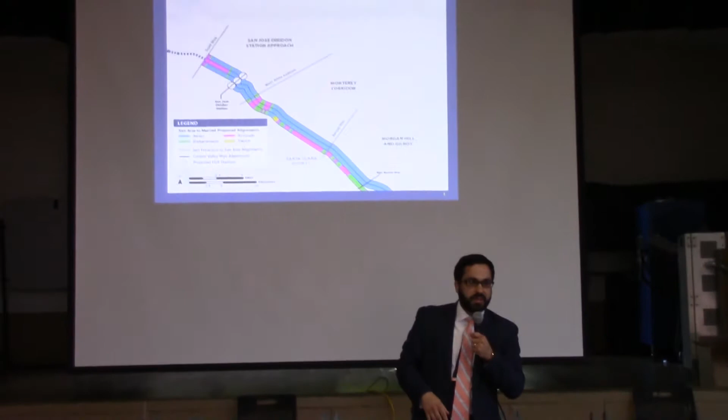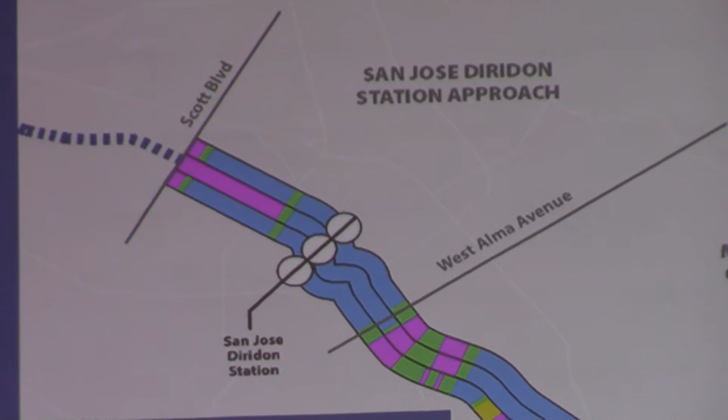To give a bit of the background and history of where we were in 2017, these were some of the alternatives we were looking at in San Jose. Starting from the northern part of the city, we were looking at a couple of different options north of Diridon, going into a viaduct and aerial structure over the existing tracks for the high-speed rail platforms, then continuing the aerial over 280-87 before coming back to grade south of the existing Caltrain Tamien station, and then either coming back onto a viaduct in the middle of Monterey Highway, or in between, or in an at-grade alignment between Monterey and the Union Pacific.

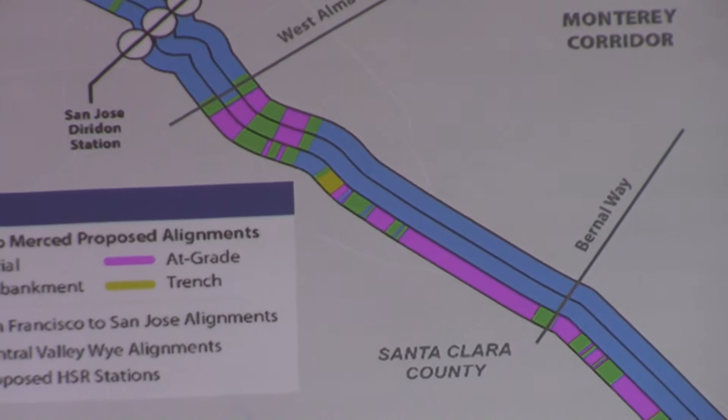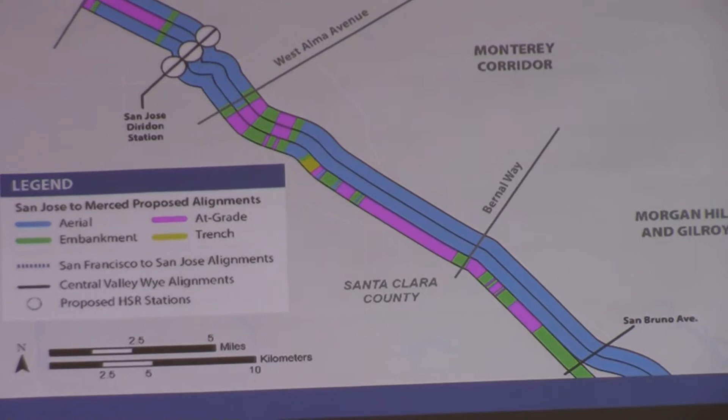Now, those were what we had. This is context setting of where we had left off. We've continued to look at things, both the city has as well as we have. That's part of what we introduced in the 2018 business plan, starting to move beyond some of this. So this is just to bring everybody up to speed on where we left off last time we were here.

What we've done over the last 6, or now I guess it's 9 months or so, we've developed a 2018 business plan, and that was submitted to the legislature in late May. So I'll talk about what that says and what it means.

We've worked with Caltrain on developing the blended corridor service plans and concepts, really looking at how the two systems work together. Some of that was mostly focused north of San Jose, so San Jose to San Francisco. But we started to look at extending that blended system concept down further south. So I'm going to steal a little bit of my own thunder here. In terms of starting negotiations with Union Pacific, what we're talking about is extending that blended system down from San Jose all the way to Gilroy using the existing Union Pacific corridor.

That really helps with some of the concerns about impacts, being able to minimize those by staying within that existing corridor and looking at sharing tracks between us and Caltrain there, in a similar blended system with a freight track next to it.

Caltrain has also been doing a lot of work, and since they're not here, I'll talk a bit about it. They've continued to advance their electrification project, doing a lot of work to modernize the corridor. We've been part of that effort with them in terms of bringing modern electric trains into the service between San Francisco and San Jose, and they've started to develop their business plan and approach, which is their next big planning document looking at the long-term service vision for how the systems work together.

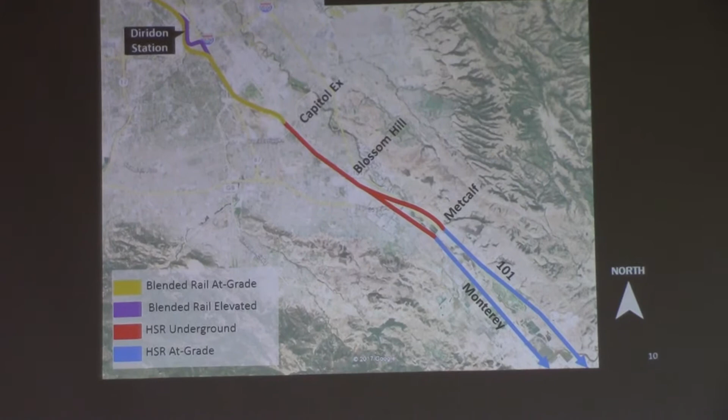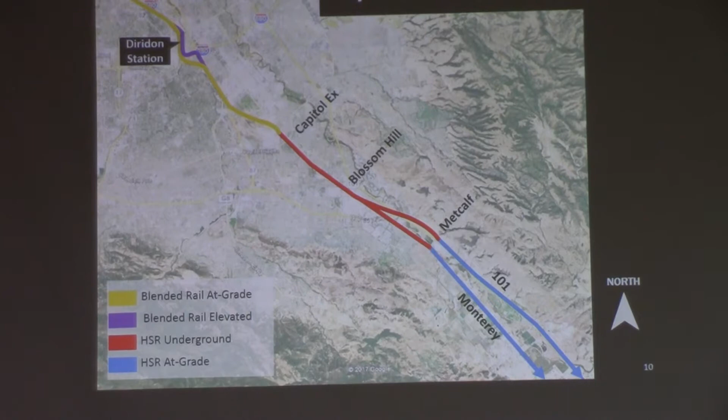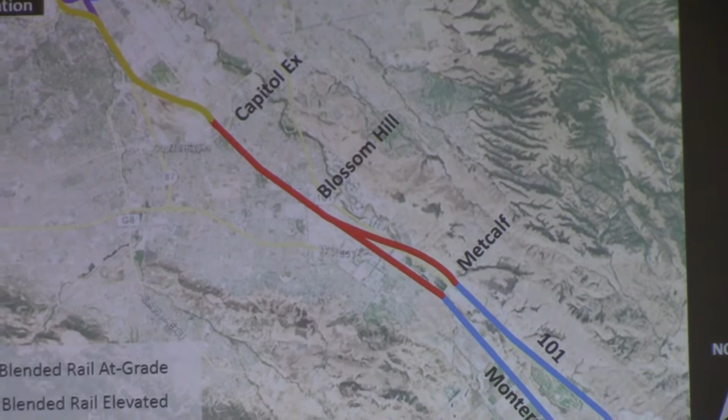As this slide shows, the City of San Jose has over 20 miles of high-speed rail alignment through it, one of the longest distances through any city in California. It goes from the northern border in Santa Clara through downtown, across Tamien, through the Communications Hill area, along Monterey Road, and down through Coyote Valley to Morgan Hill, with many different neighborhoods and impacts in different contexts. So with the city-generated options, we mix and match the type of alignment, the type of design, and the vertical alignment to match the context of the neighborhood.

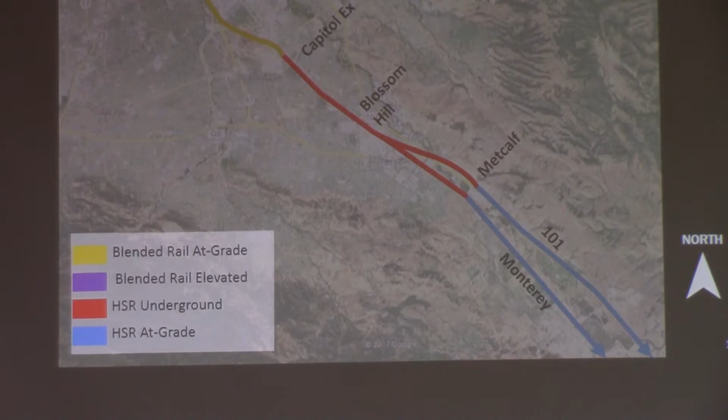In the interest of time, I'm just going to run through the entire 20 miles first, and then we'll do questions and discussion afterwards. So starting north to south, the area around Diridon Station.

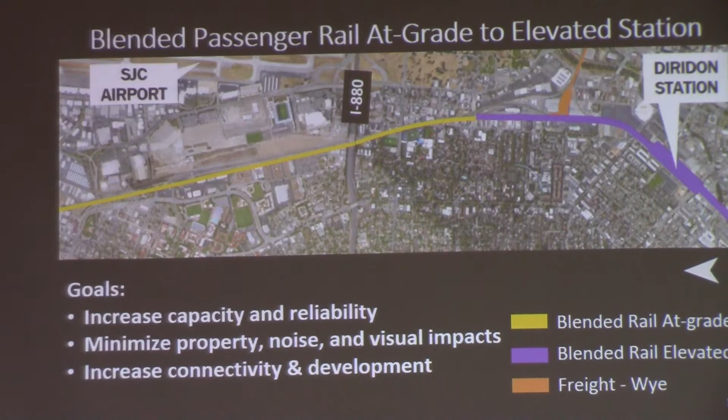So the proposal we came up with is, rather than ending the blended system somewhere between the city border and 880, to continue blended service through Diridon, keeping it at grade to around Taylor Street, and then going to a slightly elevated station, for reasons I'll discuss later. That way you can fit mostly within the existing Caltrain right-of-way, cutting back a lot on the property impacts and reducing the visual impacts as well.

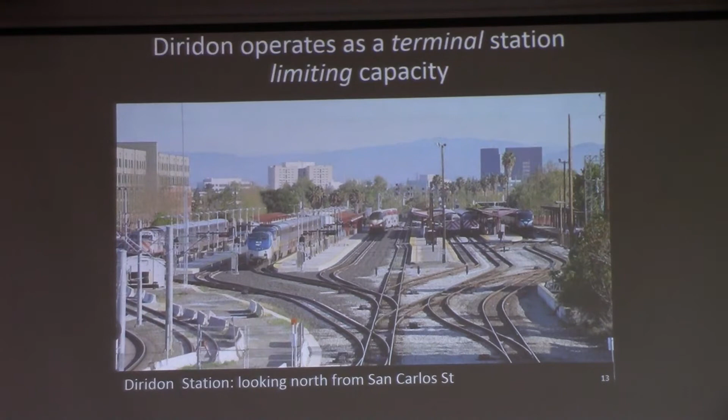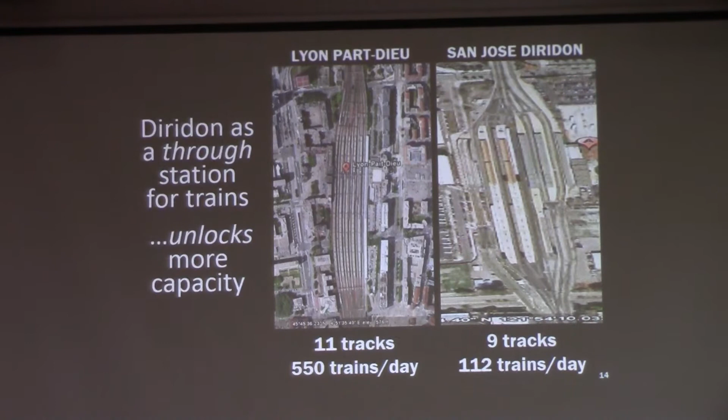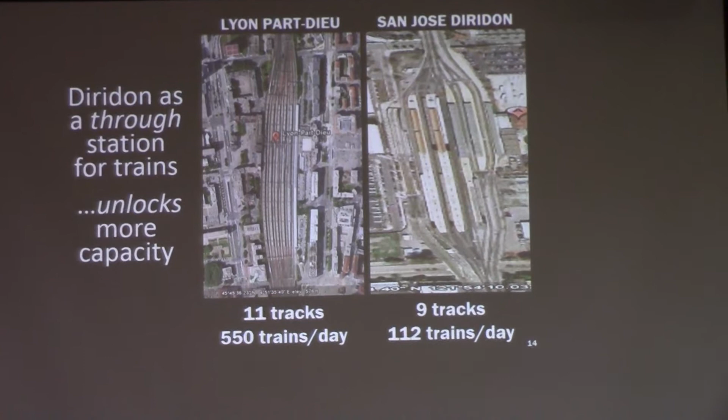So the city's proposal to unlock more capacity is making it a through station. Here's a quick comparison—this is Diridon Station, which has 9 tracks and currently about 112 trains a day. On the other side is the Lyon Part-Dieu station, a blended high-speed and regional station with over 500 trains on just 2 more tracks. If you operate Diridon as a through station, no trains stop and park or turn around—they run straight through, stop 2 minutes, and keep going in whatever direction they started from.

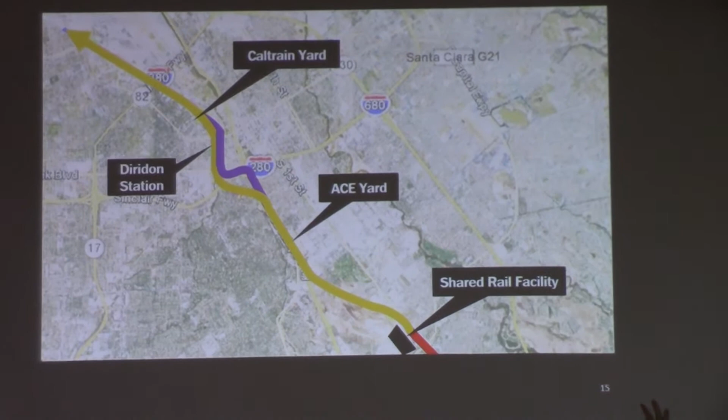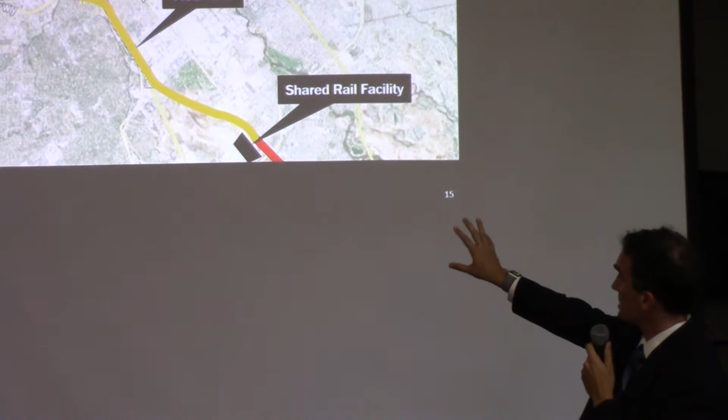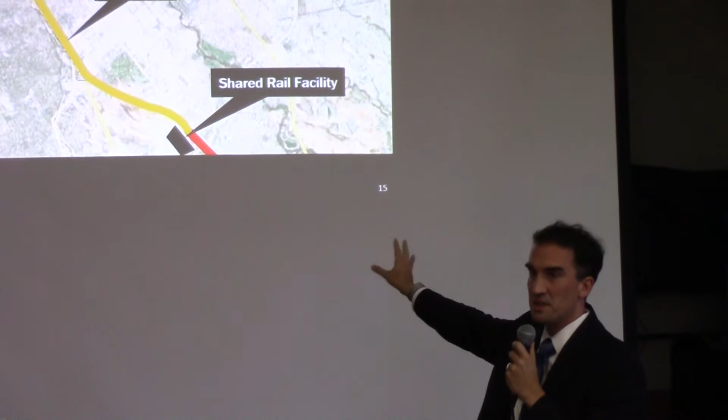You really can run a lot more trains through Diridon without adding much extra traffic. The city's proposal involves taking all the trains that park at or north of Diridon, from Caltrain and Capitol Corridor, and moving them to a shared regional facility located just above Capitol Expressway, where the drive-in theater and quarry are. That way you move all the storage from the Caltrain yard, Diridon Station, and the ACE yard down there, so trains aren't stopping or reversing at Diridon—they go straight through and do all their turnaround down at Capitol Expressway.

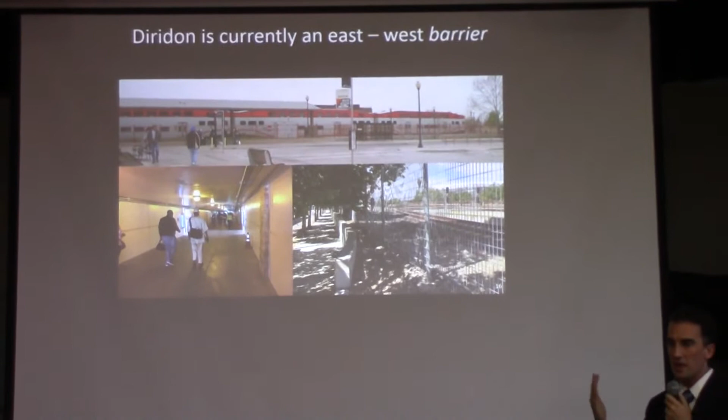Currently, Diridon is also an east-west barrier since the tracks are at grade with a slight curve. You have to put fencing up so people aren't walking across the tracks, which is obviously a safety issue. At the same time, you end up with barriers where you might be 20 feet from the platform with a security surround, and even today the undercrossing is very congested. If we double the number of Caltrains with electrification, add other services, high-speed rail on top, and all the development by Google and others on the east and west side, we get a very overcrowded situation.

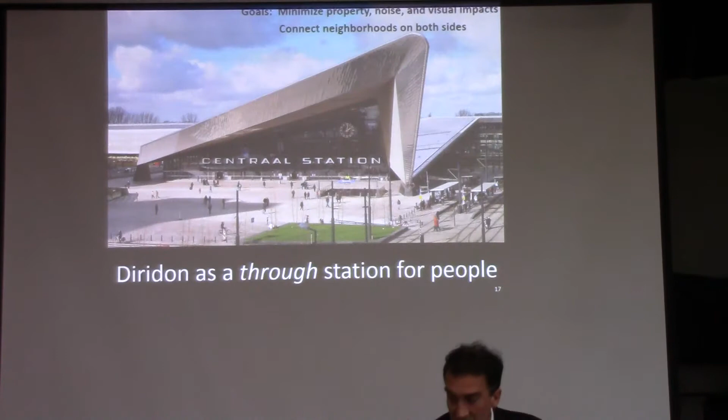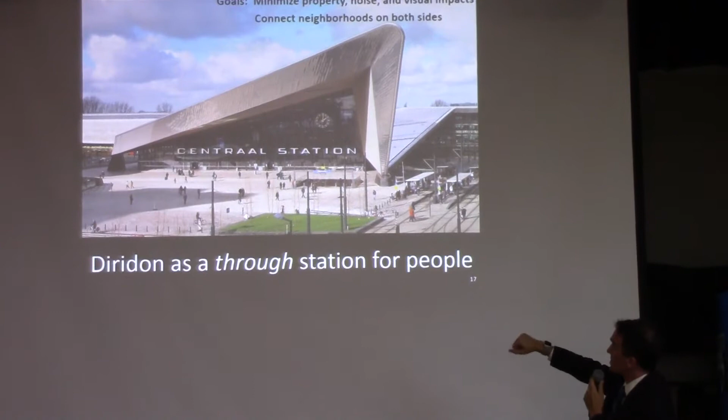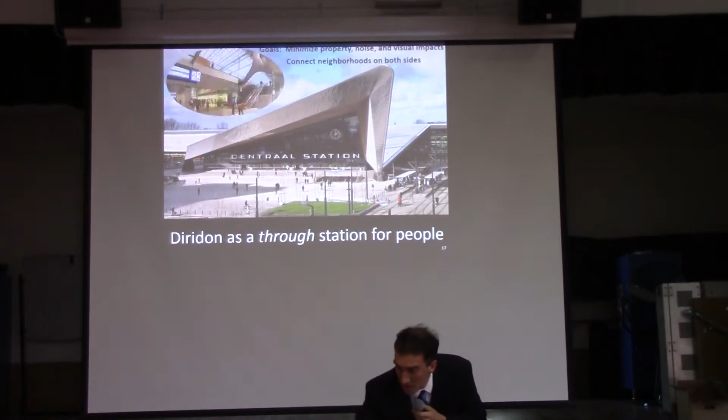So to improve east-west connectivity, the idea is to slightly elevate the station and make it a through station for people. This graphic shows the Rotterdam station—if you look carefully, right about the second floor level is where the platforms and trains are. That allows you to pass under the platforms, walk through, shop, whatever, safely under the platform without needing to fence it off because it's above you. That gives you better connectivity from the west downtown area, where Google is developing, and the neighborhoods to the west of that.

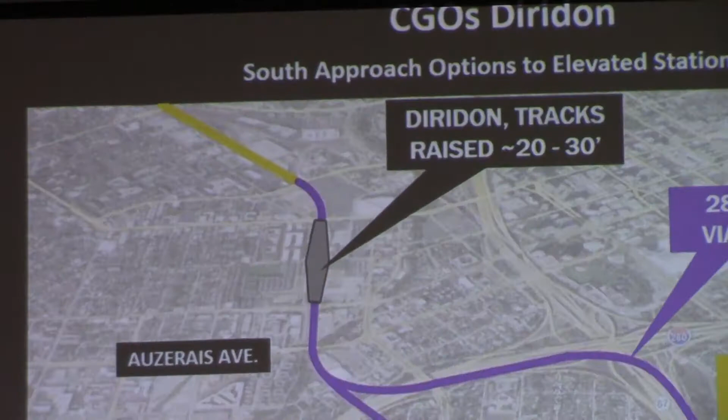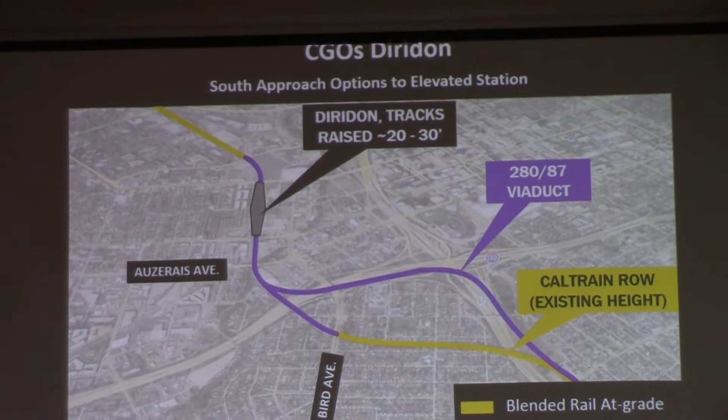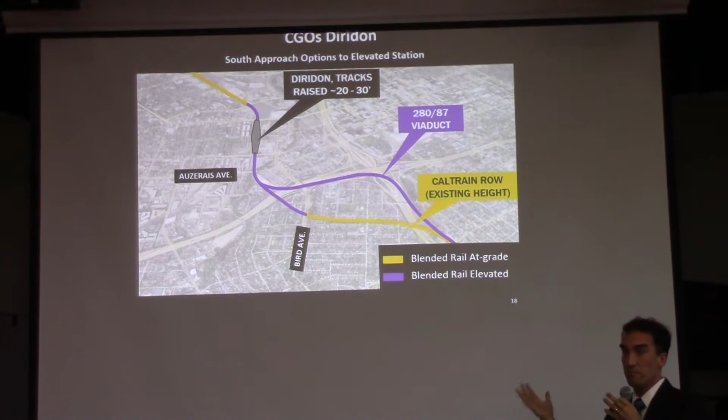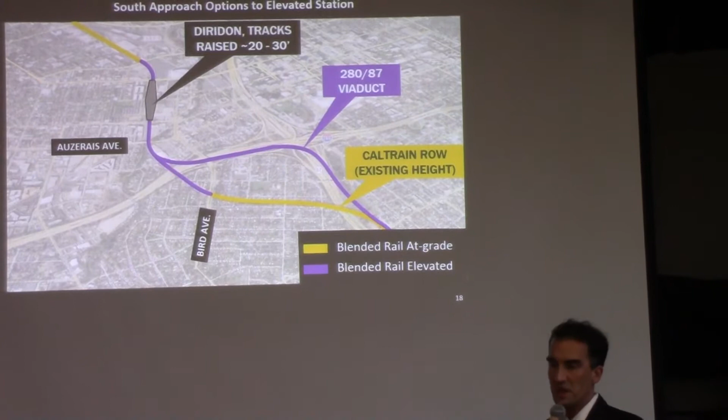Another big benefit of slightly raising Diridon about 20 to 30 feet, in addition to east-west permeability of the station, is that you get two options to go south. Either continue along the existing Caltrain right-of-way over San Carlos, Monterey, 280, and along the existing berm through Gardner and North Willow Glen, or do a variation of the high-speed rail aerial, taking all the passenger trains looping around 280 and 87, then coming back down to grade south of Taylor. Both options have benefits, drawbacks, and trade-offs, but this station configuration gives you two options to evaluate costs and benefits and make an informed decision.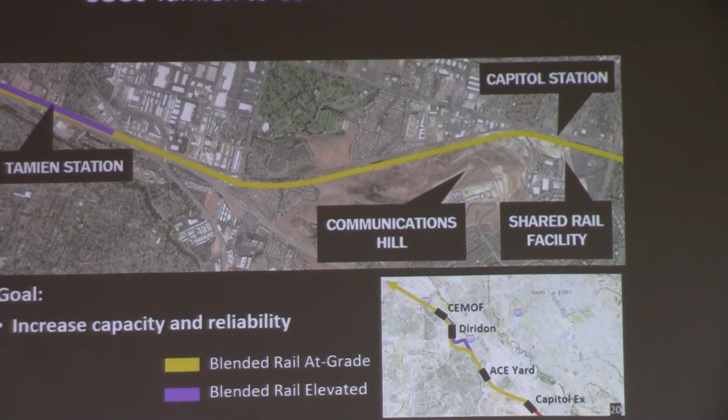Next, we'll go to the central section. Here it's at grade, much like the high-speed rail 2017 alternatives. The only difference is rather than segregated high-speed-only track, one Caltrain track, and one freight track, it's blended service—three tracks for high-speed, Caltrain, and all the other operators. Then we have the shared facility to the south where all the trains—Caltrain, ACE, Capitol Corridor—go down to turn around conveniently, greatly improving capacity for Caltrain and the other operators.

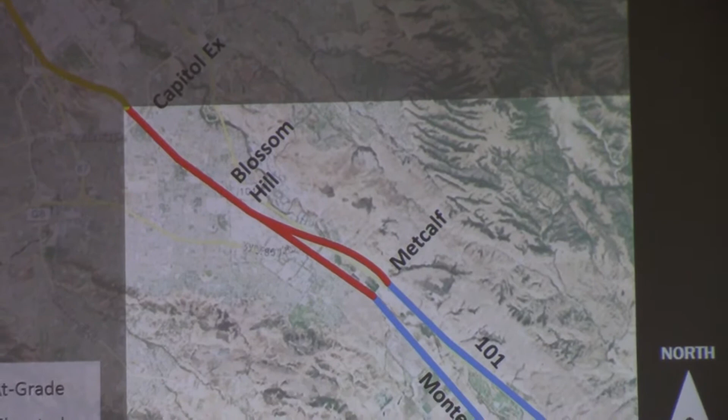All right, now we're getting to the southern section, the Monterey Road corridor. Here are the two options that high-speed rail was showing earlier on that slide: the aerial, which is 40 to 70 feet down the median of Monterey Road, or what's called at-grade adjacent to UP. Since UP wasn't working with high-speed rail, taking 60 feet to the east of that was currently Monterey Road, and building high-speed rail at grade.

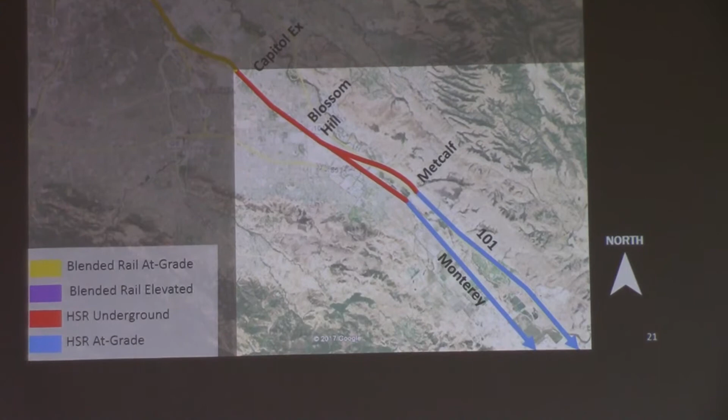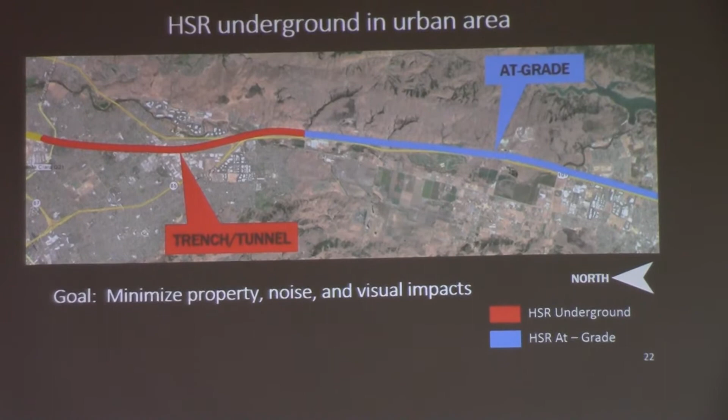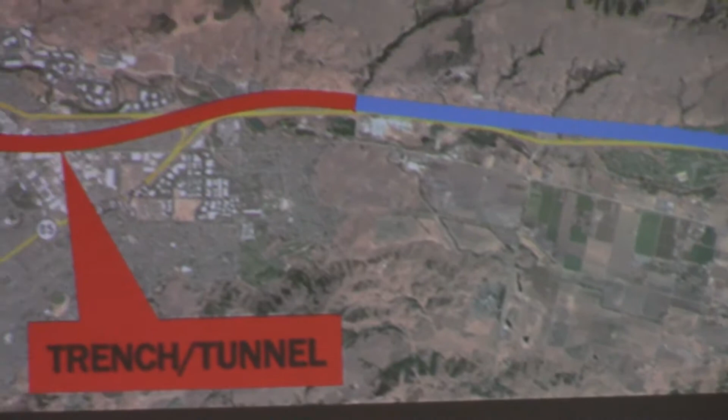So to address the right-of-way and visual impacts of those alternatives, and the noise, we had sort of two options. But the general thrust is sloping down into a ramp around Capitol Expressway, then going underground along Monterey Road, starting with the cut and cover tunnel, under Skyway, Branham, Chynoweth, and then down to about Blossom Hill.

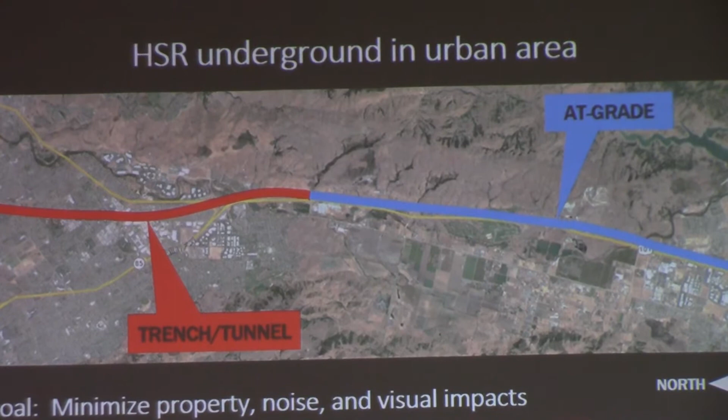From Blossom Hill, switching to a bored tunnel so we can go underneath without causing impacts to the surface, about 60 feet deep, under Silverleaf, 101, Coyote Creek, Bastón Ridge, and then coming up to grade around Metcalf Road. The hill slopes down to Metcalf Road, that's where the corner would be, and then running at grade, starting off east of 101, but as you go past the Metcalf Energy Center, you can transition to west of 101 depending on how you go through Morgan Hill.

The idea is high-speed rail looked at like a trench or a tunnel all the way through the city. That was cost prohibitive. So by doing underground in the urban area and at grade in the rural areas, it makes it less costly.

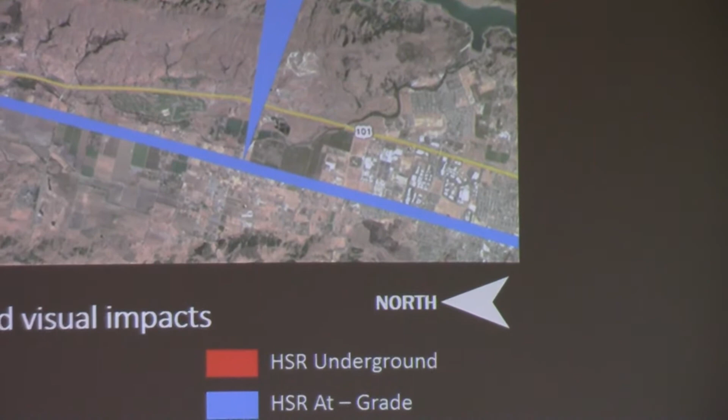Another option, which we didn't draw out, is to go along the same bored tunnel, but instead of going to 101, continue it under Tulare Hill, and then transition at grade through Coyote Valley. This would be to meet up with some of the high-speed rail alternatives along Monterey Road through Morgan Hill.

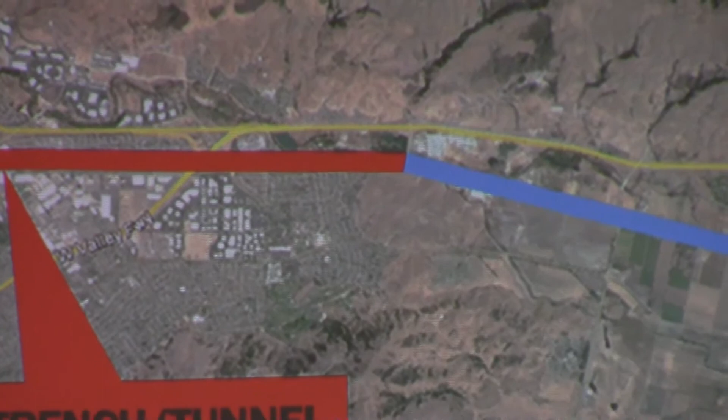And that covers sort of the CGOs as we developed them through early this year. Now I'm available for questions and discussion on the city-generated options and concepts.

Sorry, gentlemen, someone over here had their hand up earlier. Well, I think I kind of got it, okay.

I was trying to understand, I got here a little bit late, maybe somebody touched on the definition of blended. We keep using blended. Okay, so along the peninsula between San Francisco, and they were looking around the northern end of San Jose, high-speed and Caltrain use the exact same tracks. Oh, okay. And then they were looking at San Jose having high-speed only tracks, and then Caltrain and other passenger rail using separate tracks. Am I getting this right?

Yeah, and I could just give a little bit of the background of the history of the term, if you will. So before about the 2012 timeframe, the high-speed rail system was being planned as what's called a dedicated system, basically where we would be separate from everybody else, just the two high-speed rail tracks separate from everything else.

In the 2012 business plans, going back to some of those earlier planning documents, what we introduced is the concept of using, because there's already a plan in the works of electrifying the Caltrain corridor between San Francisco and San Jose, we could essentially share those tracks. That would be feasible because the speed differences in these kind of urban corridors are not as big between us and Caltrain. So you could share the same tracks and use the same corridor, and obviously then use the same infrastructure.

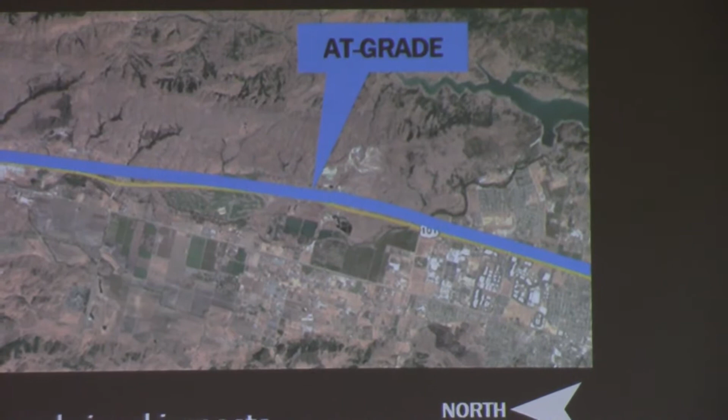Along the 101, adjacent to it - this is a simplified version, but basically it's running at grade along the freeway most of the time. There would maybe be places like Coyote Valley Golf Course Road, where it might need to go up to go over the street and then be elevated, but then it would go back to grade. Crossing Coyote Creek, obviously you need to be on a bridge.

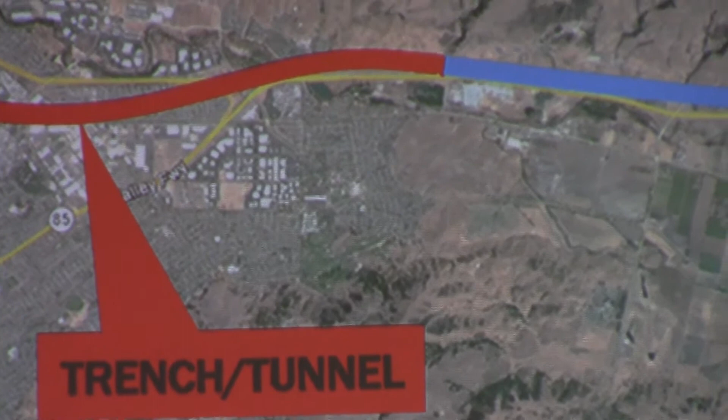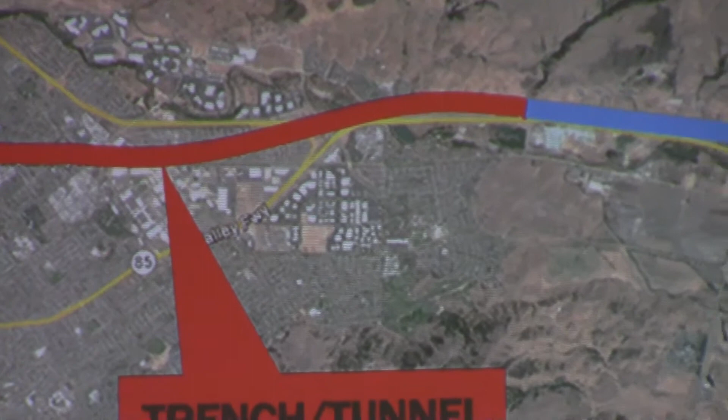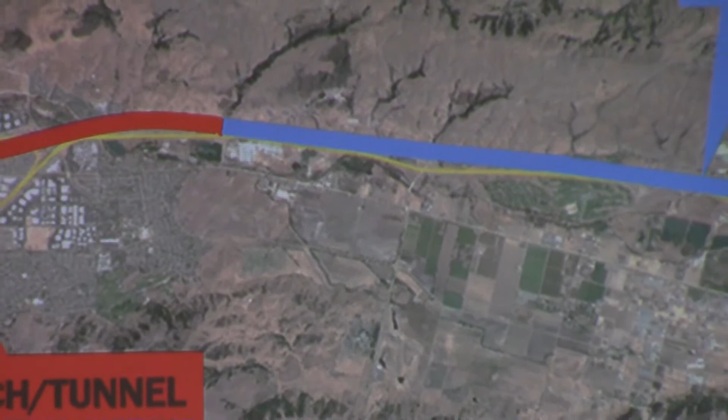But following 101, you've got to reroute it over to 101. So the first option would be to go in a bored tunnel right around the Blossom Hill Caltrain station, reroute it under 101, and then come out east of 101 at Metcalf Road, transitioning at some point to west of 101. But this would only work if high-speed rail is going what they call the Morgan Hill bypass, which goes west of 101 through Morgan Hill. So if they were going to go down Monterey Road through Morgan Hill, then obviously our alignment would need to continue down Monterey Road through Coyote Valley, or we'd have to somehow get back to Monterey Road.

But at grade, not elevated? Yeah, this would be grade. Thank you.

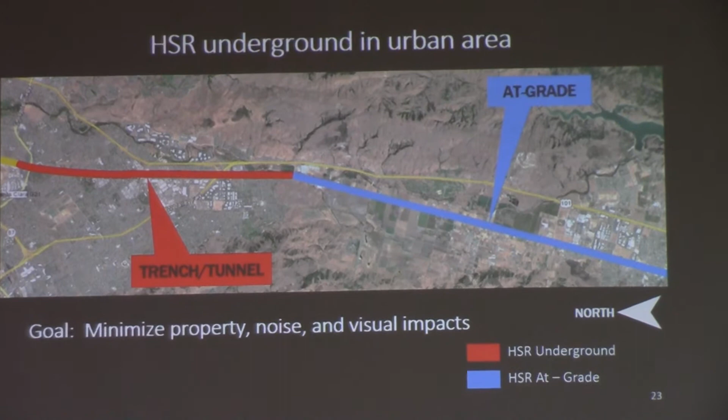I want to follow up on the same question. Just continuing down into Morgan Hill, I'm curious about the impacts on Morgan Hill. There's not going to be a stop in Morgan Hill, correct? So wouldn't they also prefer that 101 option?

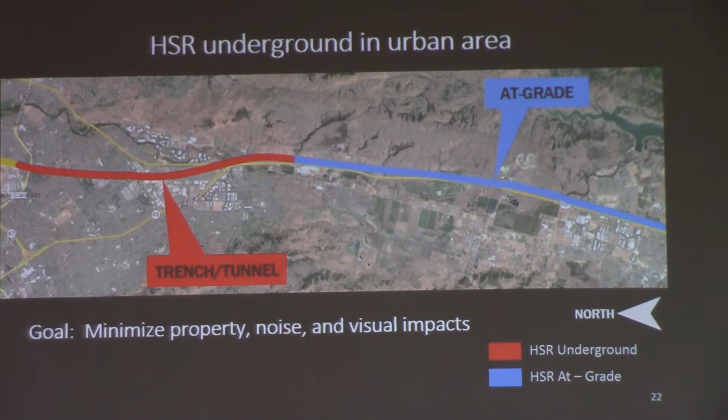Yeah, when we were doing feasibility drawings with our consultant engineers, HDR, what we really drew out was this route. At the time, Morgan Hill was really trying to get an east of 101 alternative working for them. That didn't really gel for them with the consultant they had, so high-speed rail also had a west of 101 alternative that goes through Morgan Hill. So you'd have to switch from the east to the west side of 101 to meet up with that alignment going through Morgan Hill.

So throughout the process, we were discussing with Morgan Hill city staff, because they hired their own consultant to look at different alternatives for going through Morgan Hill. Obviously, you can't have the train go through San Jose at one point, and then start in Morgan Hill 2 miles away at some other location.

Just a quick follow-up on this and then my own question - this is just a city-generated option, correct? Is the viaduct along Monterey still on the table, or is it dead? That's a question for Boris. Okay, you tell me it's dead.

Well, we obviously have done a lot of work to study those alternatives, and so those will be alternatives that we're going to work through in the process. What I'll talk about is a new concept that we're starting to develop now - I'm stealing a little bit from my presentation - and that's what we're looking at with the city as well as through some of these options.

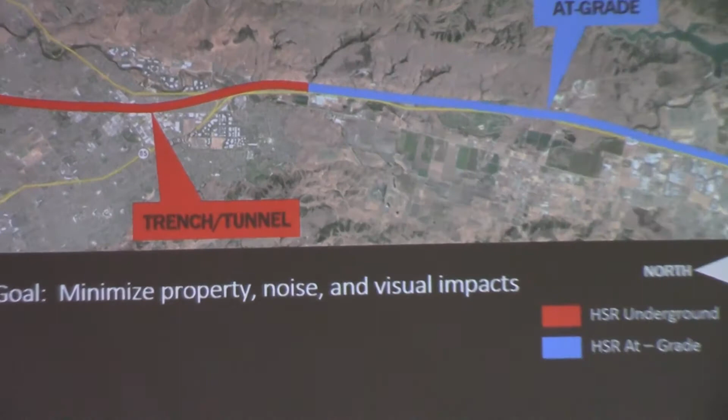You caught me without all my homework. We actually had HDR draw out 1% feasibility drawings for this alignment. The one staying on Monterey Road, we didn't have the budget for them to draw that out. Don't have the slide here, but what we're planning for the portal at Metcalf Road is on the slope - Basking Ridge Road ends, and then there's a hill, and then there's a second hill that slopes down to Metcalf. So you put the portal on that side - it makes the portal easier, and the noise bounces to the south.

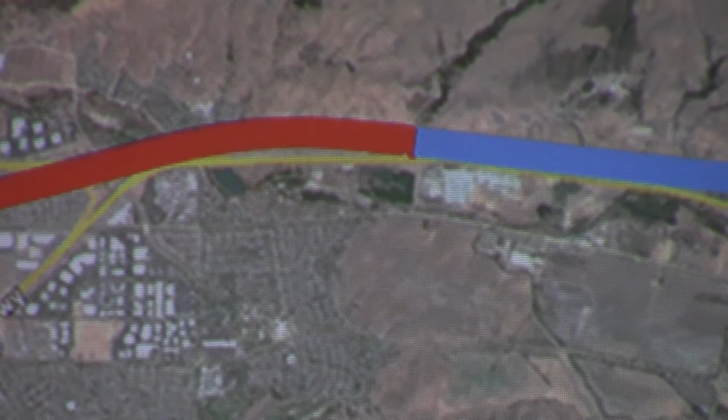I would imagine the same with Tulare Hill - you'd want it on that south slope. It shortens the transition for the portal, and it bounces the sound to the south.

Currently, ACE comes from Stockton down through San Jose. They stop at Diridon, and that's the last stop for passengers, but they actually run the trains down past Tamien Station to Tamien Yard, or Michael Yard as people call it, and stop there. Right now there's some complaints about noise and idling because there's no power at that yard, so the trains need to idle to keep them air conditioned.

So with the idea of the shared rail facility, all the storage from Caltrain Yard, from Capitol Corridor, which actually uses Diridon itself as a yard, and then from ACE at the Tamien Yard, could be consolidated down basically by Capitol Expressway.

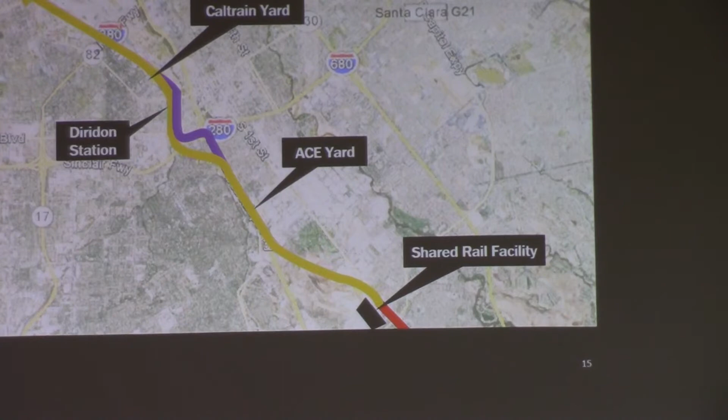And what about Amtrak? Is that Caltrain also? So the Capitol Corridor trains, there are about 14 of those. Those are operated by Amtrak, and then the Coast Starlight comes once a day. That would just keep going once a day on the same track like it does today. But I saw something about Amtrak from San Jose over to Merced via 152. Is that part of any of this?

So there's two things. One, the San Joaquin Regional Rail Agency, which runs ACE and the San Joaquin, is planning to extend ACE. Now it goes from Stockton to San Jose. It will also eventually go from Merced to San Jose and from Merced to Sacramento.

And then in Monterey County, they've also gotten money to extend train service to Salinas. They planned it to be Caltrain, they planned it to be Capitol Corridor, I think the current plan is to be one and then the other. So some sort of train will also be coming from Salinas up to San Jose, sort of like the east side, since Caltrain goes to Gilroy, extending it to Salinas.

So what about the Amtrak blending, or whatever part of that plan is? The city-generated option imagines that the tracks would be sort of two groups of tracks. One is blended passenger rail that's electrified, that any of the high-speed regional rail could use. The other would be the track for UP and the Coast Starlight, which they like to have their own track that they run their own schedule on.

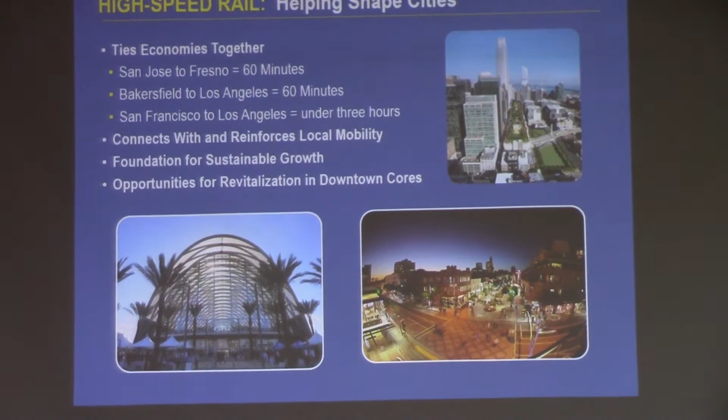So what we mean by that is really reducing some of the travel times. Right now, a trip between here and Fresno is about a 3 to 4 hour drive, depending on what happens to you on 152. That becomes a 60-minute trip. So that dramatically changes what those possibilities start to look like. Getting to Los Angeles is under 3 hours.

So I grew up in the Bay Area, and I went to college at UCLA in Los Angeles. And so that just drastically changes what those kinds of trips—coming back, going back and forth—would mean for me at that time.

There's a lot of effort in the state rail plan toward making those connections and really tying these systems together, and they all build on each other. There are major investments the state is making across the board, in local jurisdictions, improving transit connections. The high-speed rail system can serve as the backbone for that, the hub that everything else flows off of. We really see a lot of those opportunities in how the state is trying to grow, and what investments are being made, not just in our system but around other parts of the state and in our cities.

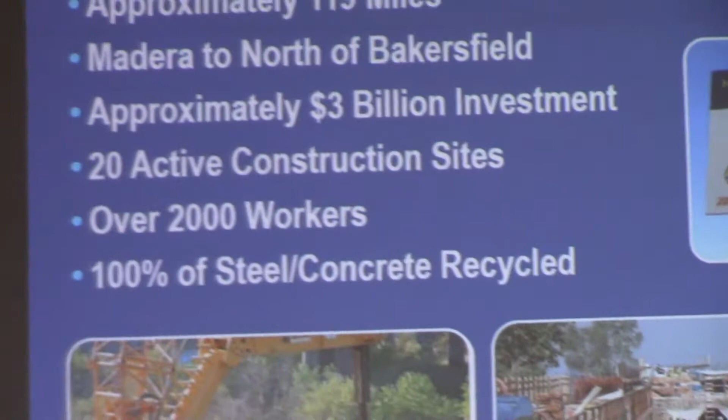So where we're at is we have 119 miles under construction in the Central Valley. It takes about 2 hours to drive from our northern construction sites to where we are in the south. I don't know the last time we built 119 miles of anything—that's just our path of getting started. We've invested about $3 billion, and we've seen a lot of economic benefits already generated from that in the Central Valley. We've got about 20 active construction sites, and we recently hit over 2,000 construction workers working on the project, so we're having really big economic effects up and down the Central Valley.

Right now we're doing a lot of bridge work. So basically, as these structures are going up, there's a lot of work going on.

So getting into the 2018 business plan—this is something we're required to do every 2 years. It's a plan we develop as an update of where the program is at, what our current status is, what the issues are, as well as what the vision is going forward. We submit it to the legislature, release it to the public, and receive public comment. We got about 500 public comments on the draft 2018 business plan, and after approval it gets submitted to the legislature. It was submitted in late May, so it's just a few weeks old, and it's available on our website.

Another part of what it does is update all the key numbers and metrics—capital costs, ridership forecasts. All of those are included as part of our business plan.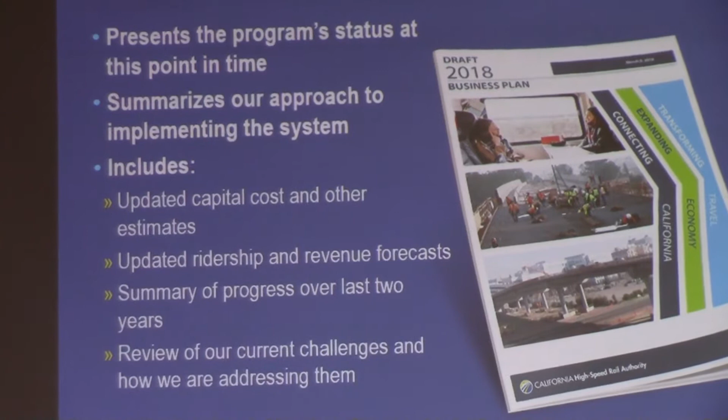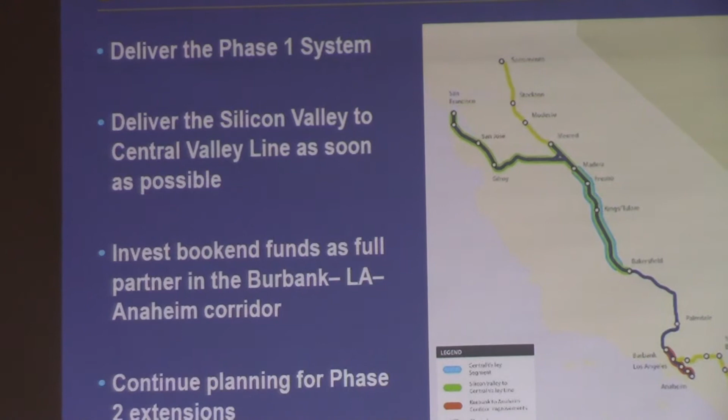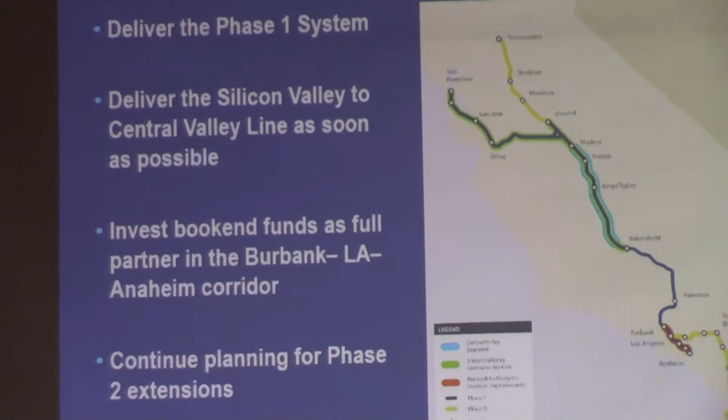In my previous role before stepping into this one, I was the Deputy Director for Strategic Planning, and I worked on the last 4 of these business plans. We do them every 2 years, and each one builds on the previous ones. While there's always opportunities to introduce new concepts, like in 2012 when we introduced the blended system concept, in this one we start to sharpen the focus and get a better understanding of where we're headed and what we don't know about the system as we're working on it.

But there are several things we continue to maintain throughout many of these business plans that are consistent between them. The first is our number one commitment: focusing on delivering the phase 1 system. The voters told us in 2008 that phase 1 would be from San Francisco to Los Angeles and Anaheim, and told us to start there. That's our number one focus overall.

We also continue the planning for phase 2, the extensions up to Sacramento and down to San Diego. At the same time, what we introduced in the last few business plans, starting the concept in 2016, is looking at where we can start service. We were talking about the Silicon Valley to Central Valley line. In this business plan, we've defined that as San Francisco to Bakersfield. It's a bit of an extension from what we had in the 2016 business plan, but we really see that as the place where high-speed rail starts to take off.

The other part we're doing is continuing to invest in our bookends. Those are projects in the existing rail corridors that have benefits for the high-speed rail system when we get there, but also have immediate benefits for local partners. That's something like the Caltrain Electrification Project that we're a part of here in Northern California, as well as a number of projects down in Southern California.

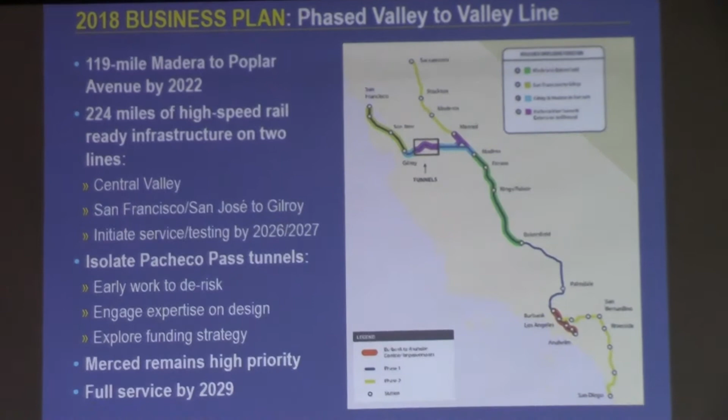What's new in the 2018 business plan is we've introduced the concept of phasing that Silicon Valley to Central Valley line. When we look at where we are in terms of our long-range funding streams, which have some uncertainty tied to them, as well as our long-range costs, when we line those things up, we see that we can deliver 224 miles of high-speed rail infrastructure that can provide immediate benefits. So we're looking at that in 2 different lines.

One is in the Central Valley, starting from where we're building north of Fresno, around the Madera area, down to Bakersfield. That connects up to the San Joaquin service and allows for connections up to Sacramento and over to Oakland. As well as looking at San Francisco, extending the electrification project from right now down to San Jose, all the way down to Gilroy. Then we can look at starting early services, which is what we're going to be exploring over the next couple of years.

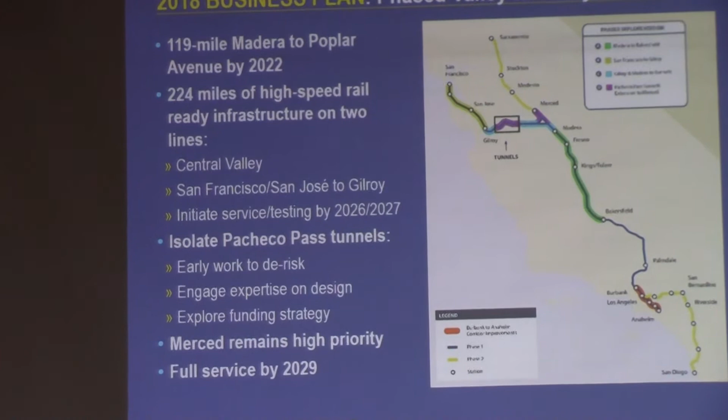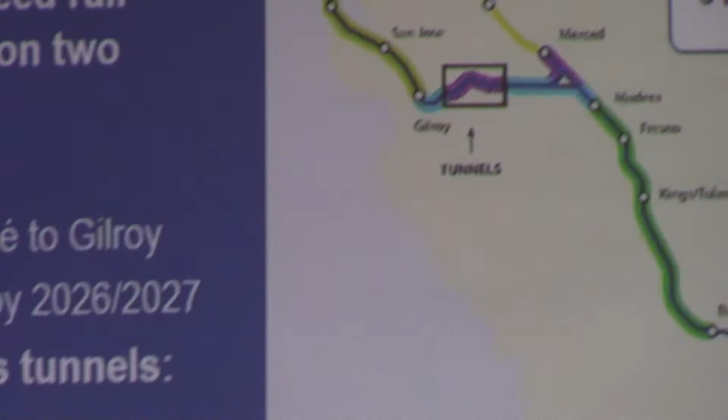What that leaves for us is really that focus on our other mega project. Everything that we do is a mega project, but the Pacheco Pass tunnels is the section in purple in the middle of the map. That's over 10 miles of tunnels we have to build. It's a huge project all on its own.

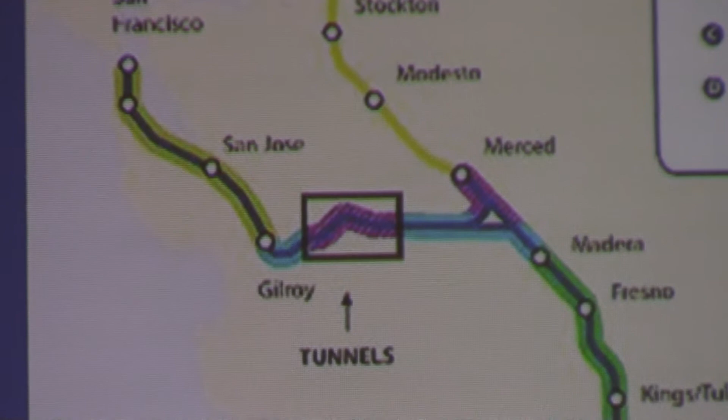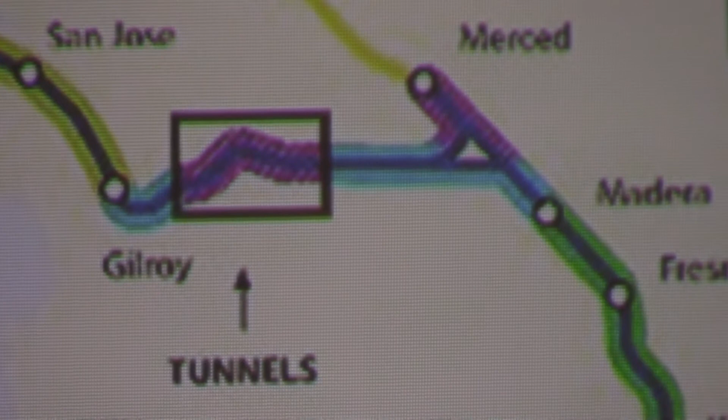We have a funding gap to be able to fund that, but we're also looking at ways to lower the risk. We're doing geotechnical studies, looking at the soil there, and really trying to improve the design to be able to deliver that. Frankly, while we haven't built those kinds of tunnels in California, those kinds of tunnels have been built around the world, so we know it's feasible, and we're trying to bring in some of that expertise to help us get that done.

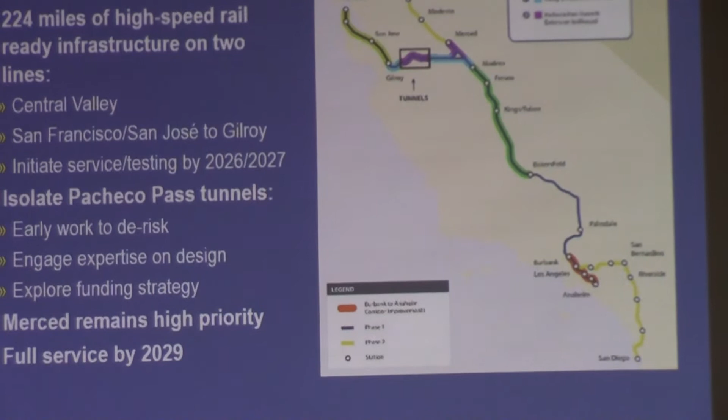Our goal is to have that San Francisco to Bakersfield service done by 2029. We want to continue to prioritize the extension to Merced as we talked about. What we lay out in the plan is that from a technical feasibility standpoint, we can get to Los Angeles by 2033, but that's not fully funded, so we still have a lot of funding to get to in order to finish that extension. But we really see being able to start providing a lot of benefits on these interim services that we can start with, and then as the Valley to Valley line gets developed.

So in San Jose, as I mentioned, we introduced this new concept of extending the Caltrain electrification project to Gilroy. Going into some of those questions about the UP corridor, Brian started to mention this a little bit. Over the past few years, when we asked them if we could stay within their corridor, use the property that they have, they always told us that wasn't an option, that they didn't want to entertain us being there with them. And that's why we often ended up next to them, which obviously has impact. So they've really changed their tune over the past 6 to 9 months.

We've been in active discussions and negotiations with them about being able to use the corridor. What that would look like is we would have 2 electrified tracks, for us and for Caltrain to use, so Caltrain could basically run electric service all the way down to Gilroy as well. And then there would be a freight track next to it.

In terms of the objectives we were trying to get through with that, it's really looking at some of the same questions that Brian was looking at in the CGOs, in terms of trying to minimize the impacts to both private property and existing infrastructure. Obviously, staying in the existing corridor has a lot of those kinds of benefits. So this was a new concept that we've introduced. We still have a lot of work to do in terms of studying it, looking at the details of how we start to lay it out, all the engineering work that's still in front of us. But we really see a lot of promise, and that's something new we want to make sure we share and describe to people. We'll have more information on it in the coming months.

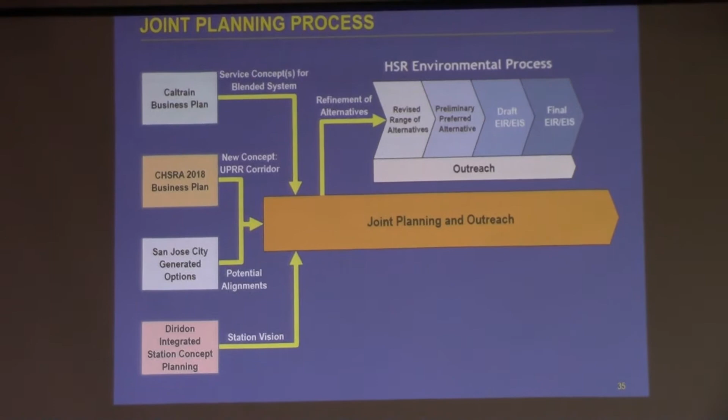Just a last slide, there's a lot of different ongoing planning work happening. The Caltrain business plan will introduce service concepts for the blended system. We introduced this new UPRR corridor concept. The city looked at several potential alignments and alternatives. And then there's a big planning effort between us, the city, VTA, and Caltrain, looking at the future of Diridon Station. There's a lot of work we're all coordinating on, and we want to make sure that all works well together.

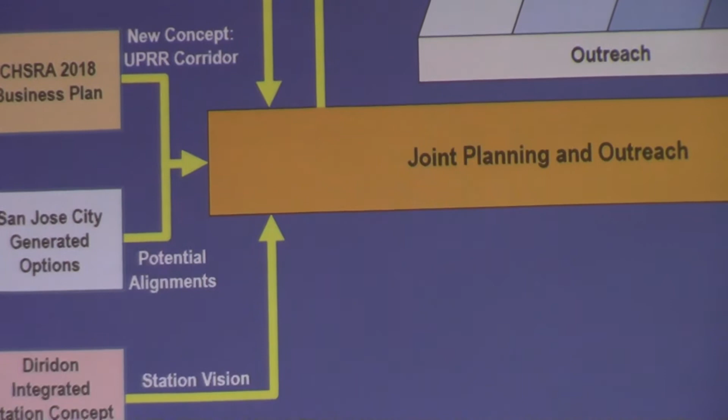Part of that will be the refinement of alternatives for us to look at in the environmental document for what it means to introduce high-speed rail into the corridor. But it's in the context of looking at those long-range visions for what happens beyond just the introduction of high-speed rail, and that's what some of these other planning studies are really focused on.

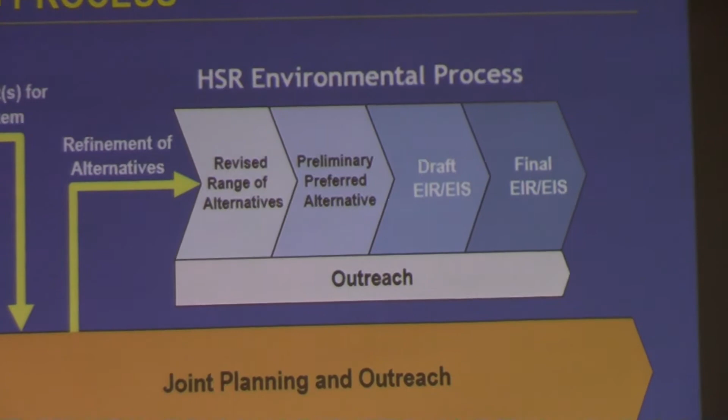And with that, I'll open for questions, and I'm sure if there's anything else on CGOs that Brian will be able to join me for that as well.

Okay, so new tracks would have to be added? Yes, but I think the key question is, can we stay within the existing corridor? That's what we're looking at, and obviously the objective is to do that. That's kind of the overall goal.

Because I know where I live, which is right up against the track, so it's pretty tough. Right, and we haven't done the detailed work of looking at it in every part of the corridor. Overall, we know it's going to have a lot of potential to reduce some of those impacts by being able to, wherever possible, stay within the corridor. We know it's not going to be perfect because there's going to be places where 3 tracks, whether it's on a curve or something else, will probably still have trouble fitting. But that's the work that's in front of us.

Yes, sir. I got 2 questions. The first one kind of follows on, I think, what this gentleman was getting at: where is the concept of eminent domain going to come in to start affecting private and business locations and stuff like that? Because I heard a couple of rumors about, shall we say, impact on housing, especially in the Morgan Hill area.

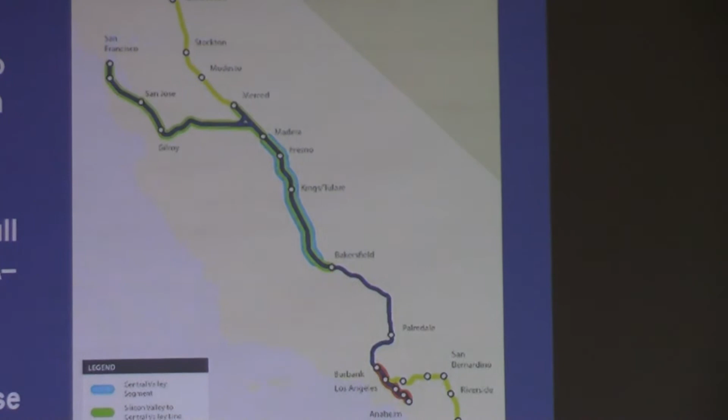So the high-speed rail stops are all those white dots on this map. I know it's a little hard to read, so the top one on the left side is San Francisco, Millbrae, San Jose, Gilroy, and then the top of the blue line is Merced, a stop in Madera, Fresno, a stop in Kings Tulare around the Hanford area, and then Bakersfield, Palmdale, Burbank, Los Angeles, and then stops between LA and Anaheim, and Anaheim.

So that's phase 1. But there's also the corridor here with Caltrain stations, right? There's Caltrain service—we talked a little about Morgan Hill earlier. Caltrain serves Morgan Hill, and there are opportunities to look at what that service looks like in the future if we're electrifying the corridor. That starts to change the dynamic with Union Pacific as well.

So San Jose, you say Diridon Station? Yes, San Jose Diridon Station, yes.

And then the safety of the trains—I ride there weekly, going south and back, and they blow their horns, the train horns. They're required to do that at certain locations, streets, going through Fresno right next to it. Is there something you can do so they don't blow their horn, because it disrupts city workers or something? So what about that noise that's required for safety?

Sure, so basically the trains do have to blow their horns. There's what's called quiet zones that the city can apply for in specific areas. So what we would be doing is, because as part of that you need to have certain investments in protection around the crossing.

So having, for example, quad gates, instead of having one arm on one side and another arm on the other side, having arms on all four sides, in terms of some of those kinds of protections. Now, ultimately, that would be up to the city to decide if they want to apply for something like that in terms of quiet zones. As part of our analysis of the noise, we would also be looking at noise mitigation measures, what we could do to reduce some of those impacts.

They can't tell us in that same meeting, okay, we'll cancel the viaduct. They can't do that, there's a whole process that's going through. But the fact that the city even came up with their own options, I want to commend the staff, especially John Ristow and the others that came out to meet with us. Those options, they are being responsive, they are concerned about how this is going through. One of the things I've raised at community working group meetings is that, because we're the largest city on this route so far, we should be kind of the crown jewel. I want us to be the example of how high-speed rail and the city and the community all work together to come up with a world-class system done the right way, where all the impacts are minimized as possible. I think it's frustrating, obviously, to see the proposal and think, why didn't they think of this, why didn't they think of that. A lot of the stuff I'm learning, they've already thought of it, 15 years ago, before any of us were involved in this.

So, but they are being responsive. It's going to be a long process, a difficult process, but I think we've made it clear we don't have to buy it up. And honestly, I don't think it's the cheapest option anymore. I think the Caltrain blended option is possibly the cheapest, or certainly the most beneficial for our area. That's the most likely to get cars off 101. That's what San Jose gets out of this, for the rest of the areas, not downtown, it's getting traffic off the roads. Because no matter what, we've got 30 more million people coming in the next 50 years or whatever, and they're all moving to Gilroy, almost, right? There's just no way we can build enough freeways, and in fact, high-speed rail will be cheaper than building more freeways.

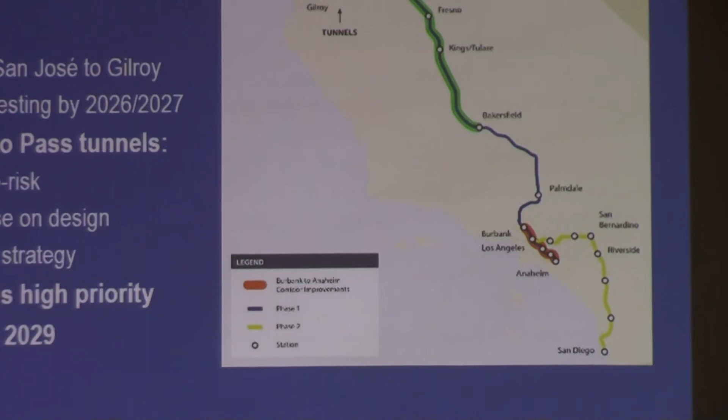So anyway, they've been responsive. I want to commend them publicly, and let's give them a chance to work through the process. Thank you, I appreciate it.

The lady in the back asked a question a while ago, and that is, when will high-speed rail make a decision on the San Jose proposal?

We're just starting down the process, so I don't have a final answer in terms of the date. But I think it's something in the next few months. I think it's the next 6 months. No, I think we'll be there sooner than that. So I think it's the next few months, less than 6 months.

My question is on that same topic. In the decision-making process, there are meetings between the two entities. Are those meetings open to the public, or will the discussions be publicized?

The discussions, the body of discussions - is that something we are going to be able to have access to, or will we have to just wait for the decision?

So these are pretty technical meetings, being done at the staff level. We will be back with information about where things are starting to form up as we get into trying to formalize an agreement. Obviously, all of those things will be public processes, so we will have more information for the public, as well as opportunities to hear from the public on these things. So we'll be having access to that information maybe before a decision is made, or after.